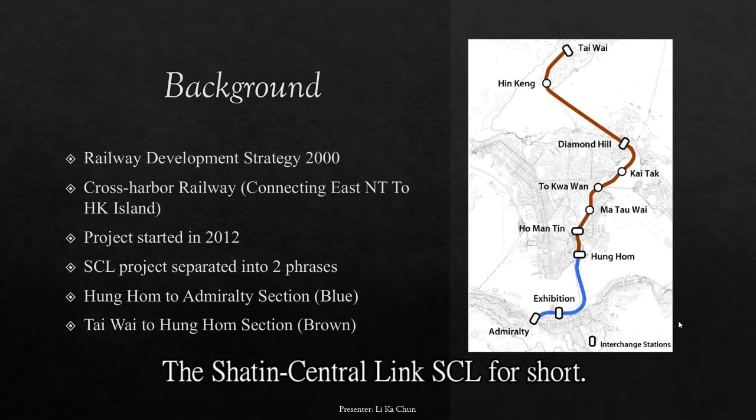The Shatin-Central Link, SCL for short, this project has been proposed in the Railway Development Strategy 2000 by the Transport Bureau. The SCL provides a new cross-harbour option and connects the East New Territories and Hong Kong Island. The SCL project is funded by the Hong Kong government. The construction project started in 2012.

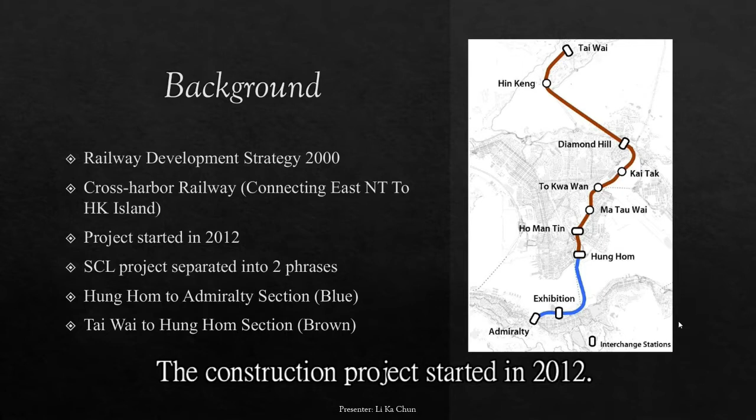The SCL project will be separated into two phases: the Hung Hom to Admiralty section and the Tai Wai to Hung Hom section. The most important part of our project is why we are doing this project and what we want to achieve, and there are three main objectives for this project.

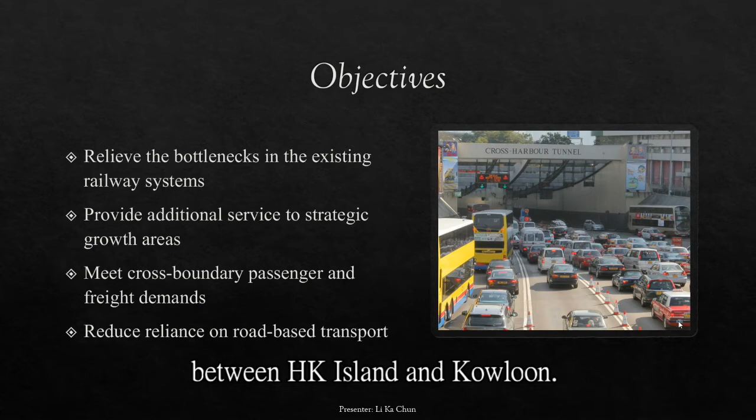First, as the high demand of the cross-harbour tunnel between Hong Kong Island and Kowloon is creating traffic jams, leading to economic loss and wasting time, this project is needed to relieve the situation.

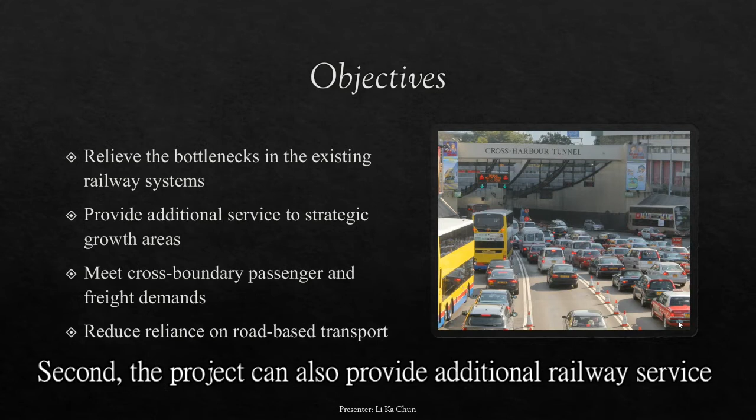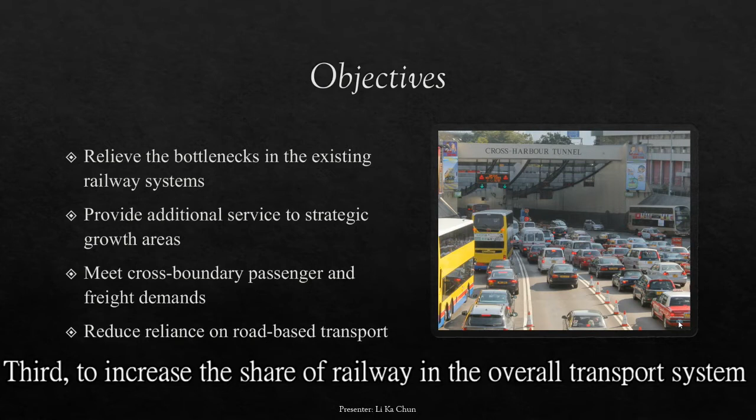Second, the project can also provide additional railway service to strategic growth areas for housing and economic development. Third, to increase the share of railway in the overall transport system to reduce reliance on road-based transport.

For the short-term goals, the section between Kowloon Tong and Tai Wai station of the East Rail Line is very busy. Passengers from the Ma On Shan district and New Territories need to pass through Tai Wai station, while more passengers can only interchange at Kowloon Tong station.

Therefore, the SCL would be able to relieve the bottlenecks in the East Rail Line and the cross-harbour section of the Tsuen Wan Line. The project also connects locations lacking convenient public transport, including Ho Man Tin, To Kwa Wan, and Ma Tau Wai area.

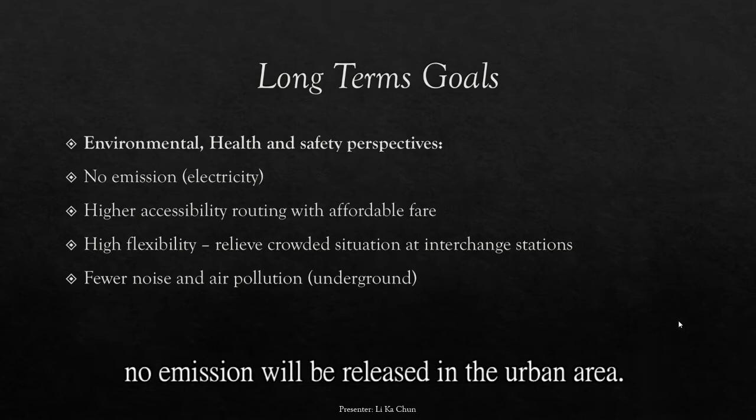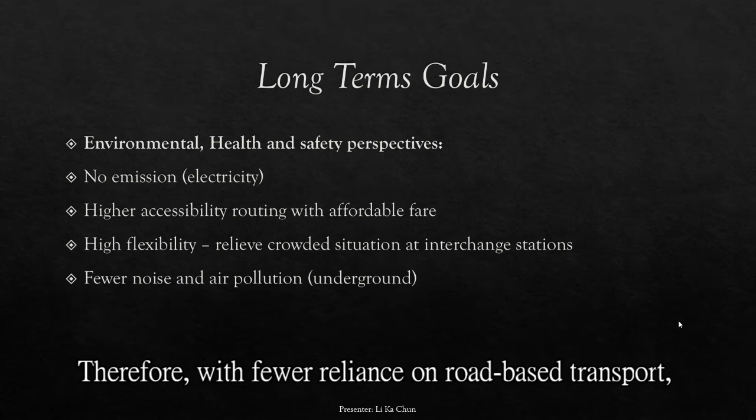For the long-term goals, trains use electricity and no emissions will be released in the urban area. In addition, with higher accessibility and affordable fare, people may tend to choose railway rather than driving. Therefore, with fewer reliance on road-based transport, less noise and air pollution will be produced.

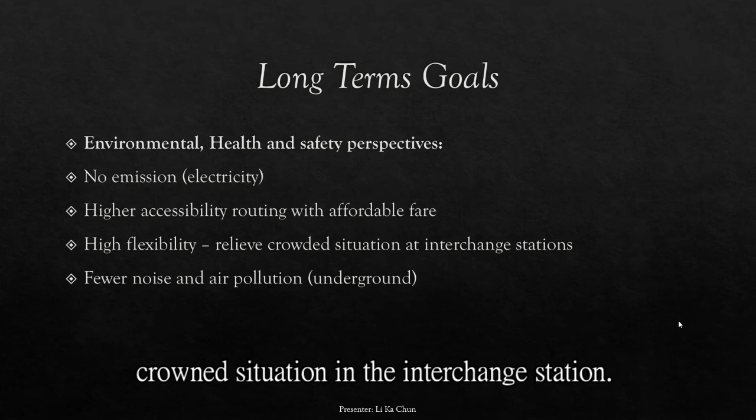The high flexibility railway could help relieve the crowded situation in interchange stations. Therefore, the SCL project could contribute from environmental, health, and safety perspectives.

One more thing is the social and economic benefits. The SCL project is estimated to carry 1 million passengers per day, which could bring 4.1 billion Hong Kong dollars revenue per year, including the economic benefits by saving time.

The SCL can also generate employment opportunities during construction and operations. Now let's talk about the scope of the project.

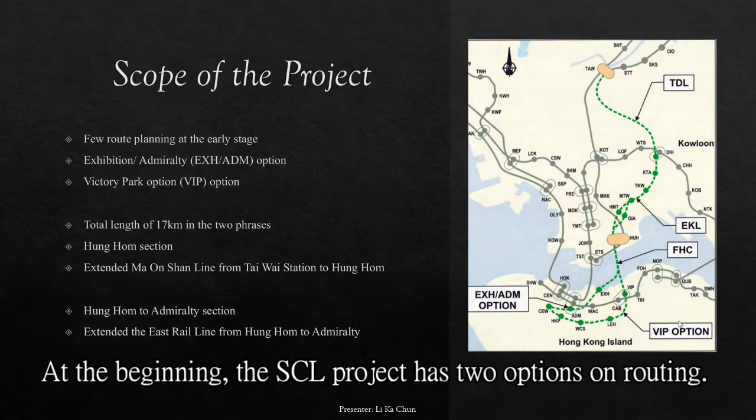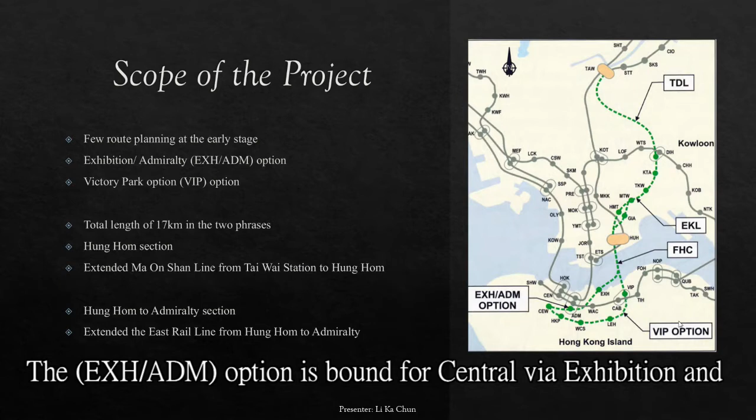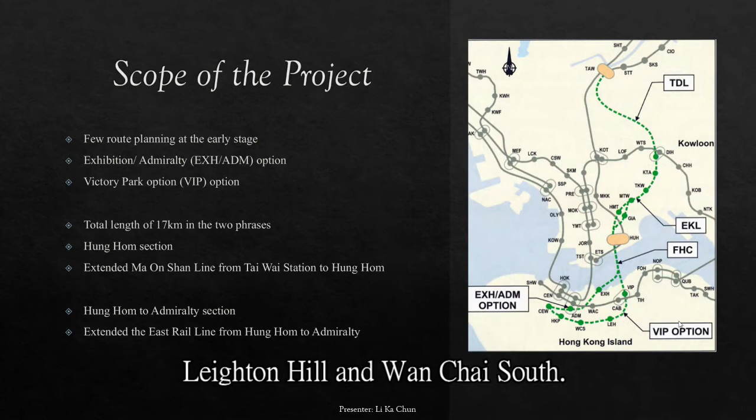At the beginning, the SCL project had two options on routing: the Exhibition or Admiralty option, and the Victoria Park option. The Exhibition option is bound for Central, Exhibition, and Admiralty stations. However, the Victoria Park option is via Victoria Park, Leighton Hill, and Wan Chai South. Finally, the SCL project adopted the Exhibition option.

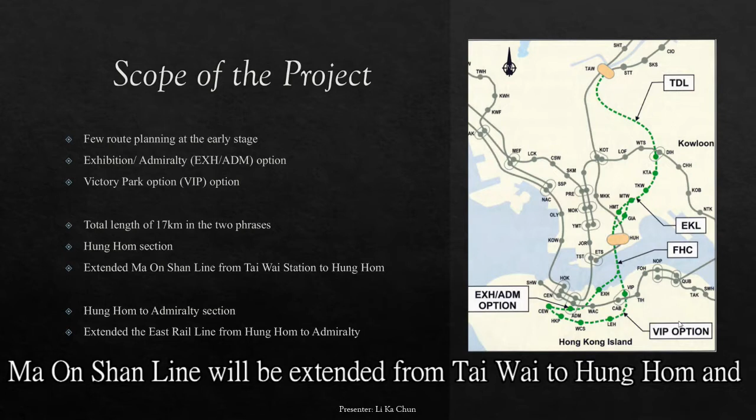The current project has been separated into two phases, total length 17 km. For the Tai Wai to Hung Hom section, the Ma On Shan Line will be extended from Tai Wai to Hung Hom station and connect the West Rail Line to become the Tuen Ma Line.

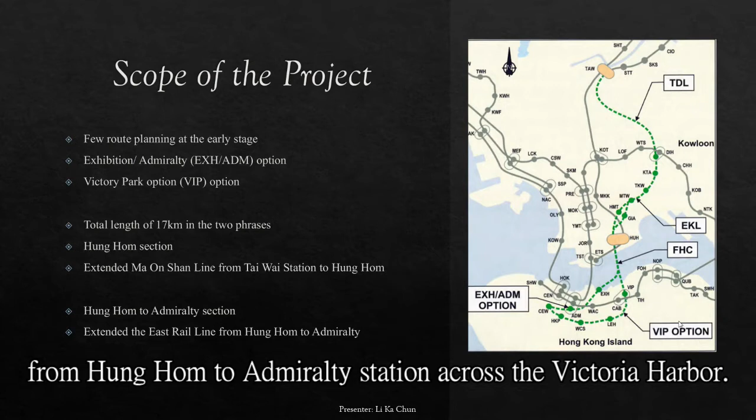And the Hung Hom to Admiralty section is extending the East Rail Line from Hung Hom to Admiralty station across the Victoria Harbour. That's all of my part, and I will pass my time to Herman for the following part. Thank you, David, and I'm Herman. About the specific targets of time and cost.

In 2008, the Hong Kong government approved the planning and design of the Shatin-Central Link. In 2010, the Railway Scheme Gazette was published to inform the public. In 2012, the funding for the SCL project was approved and construction commenced in the same year, expected to be completed in 2022.

The SCL Phase 1 experienced poor construction quality at the Hung Hom station, leading to delayed commencement of the SCL project. The Tsuen Wan Line has been split into two phases. Regarding the cost, simply estimated, the maximum cost would be 100 billion Hong Kong dollars.

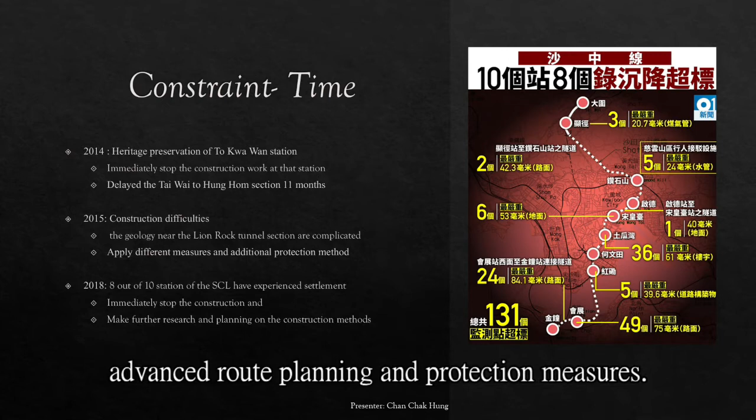For the time constraint, in 2014, previous historical relics were found at the To Kwa Wan station construction site. The MTR immediately stopped construction work at that station and conducted a detailed survey for advanced route planning and protection measures. This action delayed the Tai Wai to Hung Hom section for 11 months.

Second, there were construction difficulties in 2015. The geology near the Lion Rock Tunnel section is complicated.

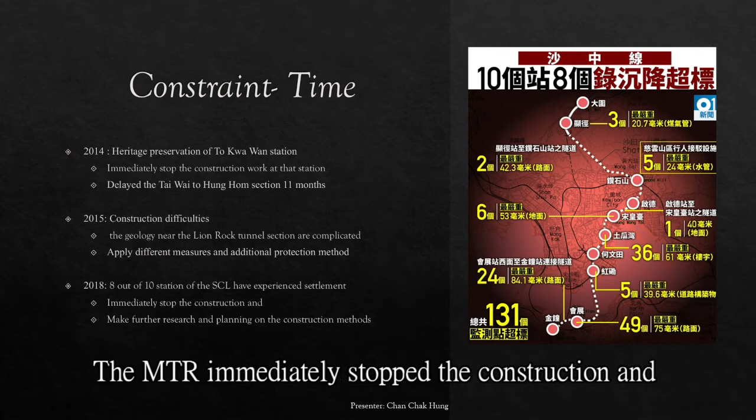Therefore, the MTR company is required to apply different measures and additional protection methods to solve the problem. In 2018, it was discovered 8 out of 10 stations of the SCL exceed the settlement level standard. The MTR immediately stopped the construction and made further research and planning to ensure the settlement event will not influence other buildings and road conditions.

With regard to the cost, the MTR estimated that the construction cost increased from 79.8 billion to 97.1 billion Hong Kong dollars, as the construction process and commencement date were delayed. The first reason would be a series of construction difficulties mentioned in the previous slide. Second, COVID-19 and other accidents affected the process of the project significantly.

Let's move to discuss the social concern. Construction brings inconvenience to the society. The East Rail Line is one of the busiest sections of the MTR, as it connects people between Kowloon and New Territories. It's now extending to Hong Kong Island, where there is space limitation, so 12-car trains will be reordered into 9-car trains. Obviously, this will lead to more crowding in some interchanging stations, such as Hung Hom, Kowloon Tong, and Tai Wai. Although MTR proposed that the frequency of the train would be increased from every 3 minutes to every 2 minutes, it's not guaranteed.

Besides, there would be some economic concern. In 2012, the Hong Kong government estimated the cost to complete the SCL project is 79.8 billion Hong Kong dollars. However, it has already become the second most expensive railway globally. MTR explained that the cost increase is because of inflation. In 2020, the estimated cost became 81.6 billion Hong Kong dollars. If the SCL project exceeds the budget again, it's hard to convince the general public and government for further construction capital.

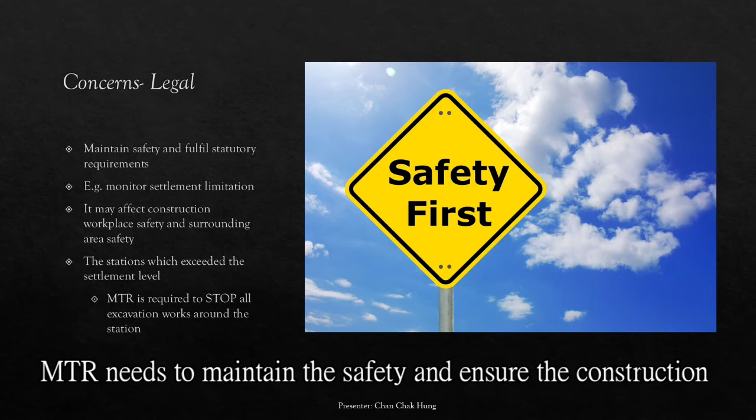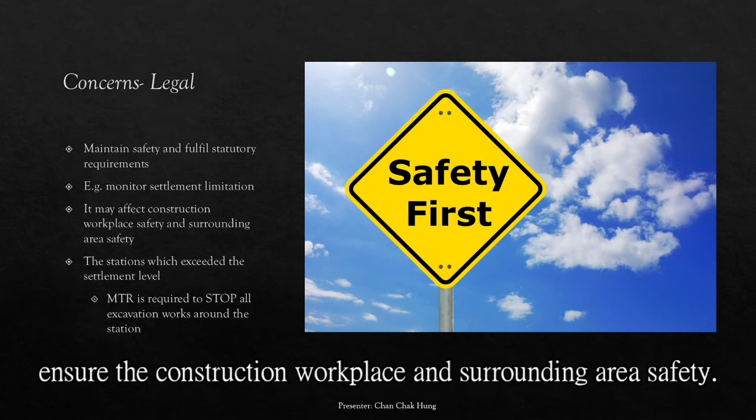With respect to the legal concern, MTR needs to maintain safety and ensure the construction meets legal requirements. For example, MTR needs to monitor the settlement limitation to ensure the construction workplace and surrounding areas are safe. In terms of technical concerns, there is less room for constructing new stations, tunnels and platforms in Hong Kong. The only solution is to construct underground.

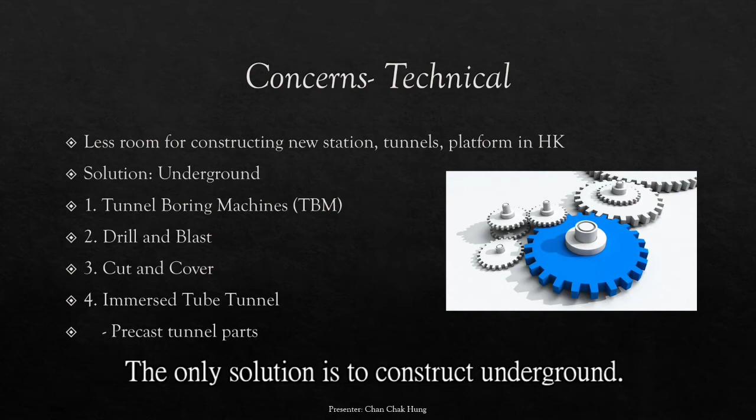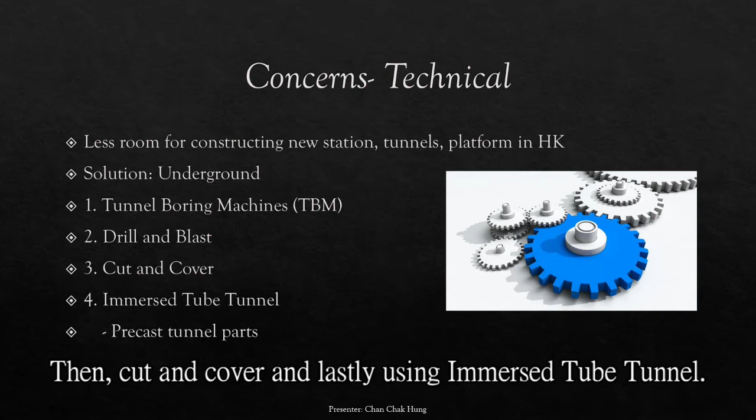The MTR proposed 4 steps. First, using tunnel boring machine. Next, drill and blast, then cut and cover. Lastly, using immersed tube tunnel.

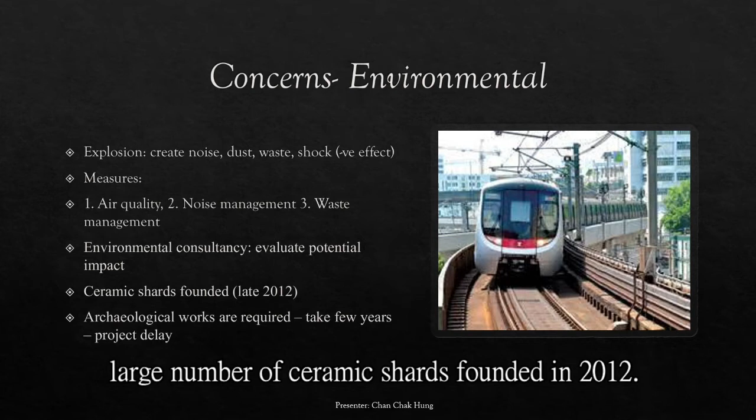The last concern would be on the environmental aspect. The construction will create air pollution, noise pollution and chemical waste. The MTR is required to propose some measures to alleviate the problems. Moreover, there are a large number of ceramic shards found in 2012. Then, archaeological works are required, which might take a few years. Therefore, it's believed that the cultural village and historical sites would affect the process of the construction.

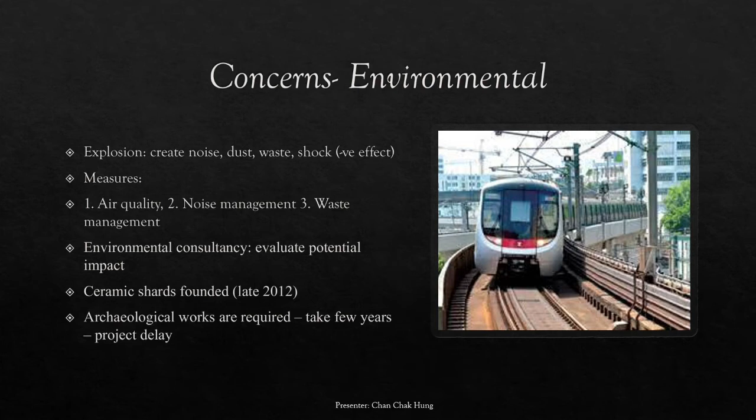The Hong Kong government offers funds to the construction of SCL and entrusted MTRCL to carry out the project. The EAT and IAP are the third-party audit teams hired by the government to monitor the progress and review any irregularities. Different government departments have to monitor the project progress and report the latest information to the Transport Housing Bureau, while the construction team and quality team of the MTRCL are responsible for the construction work of the SCL project and review the construction work quality respectively.

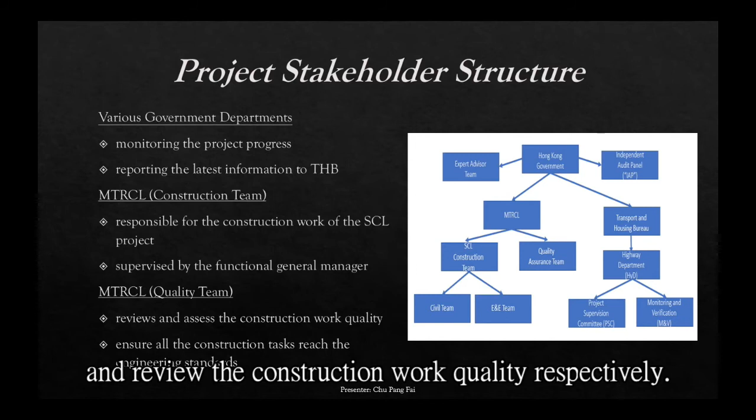For the Highway Department's role and responsibility, they have to hold monthly project coordination meetings and project progress meetings with the MTRCL and conduct inspection audits. Two consultant companies are hired by the Highway Department: M&V and PSC. The Project Supervision Committee, PSC, is mainly responsible for procurement activities, post-tender cost control, resolution and contractual claims. Monitoring and Verification, M&V, assists the monitoring work and conducts regular audits.

The expert advisor team is formed by the Transport Housing Bureau and 3 senior retired government officers deployed from the Highway Department, Building Department, and Civil Engineering and Development Department. They have to provide technical support and review the latest progress of the SCL project.

Their major responsibility is reviewing the work performed by the related stakeholders and proposing improvements to the existing project integrated management system of the MTRCL. For the Independent Audit Panel, IAP, they are responsible for auditing the project improvement plan and progress of implementation by submitting reports.

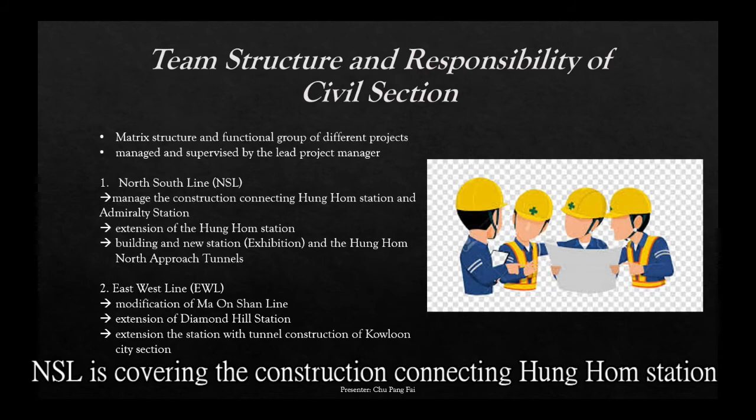NSL covers the construction connecting Hung Hom Station and Admiralty Station, while the EWL involves several station modifications of the Ma On Shan Line.

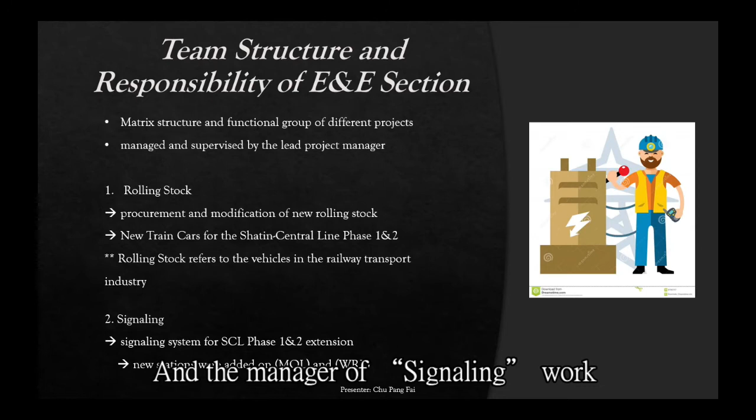Then it shows the team structure of the E&E section. It is also matrix informed, and the most important projects would be rolling stock and signaling. Rolling stock refers to trains, and the manager is responsible for procurement and modification of new rolling stock, while the manager of signaling works on a number of signaling systems for the SCL Phase 1 and 2 extension.

Then I will pass to my groupmates to talk about the project plan. Thank you, Fred, and I'm Carrick. Now I would like to introduce the Shatin-Central Link project Gantt chart.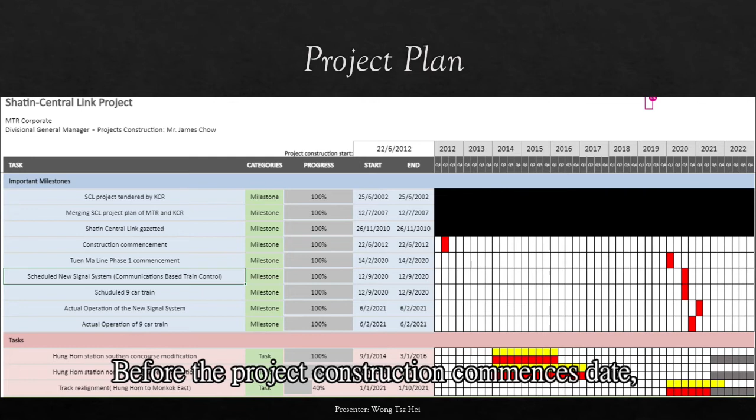This Gantt chart shows the milestones, tasks, and targets of the SCL project. Before the project construction commenced, there were several milestones achieved. For example, the MTR and the KCR cooperated to merge the SCL project plan.

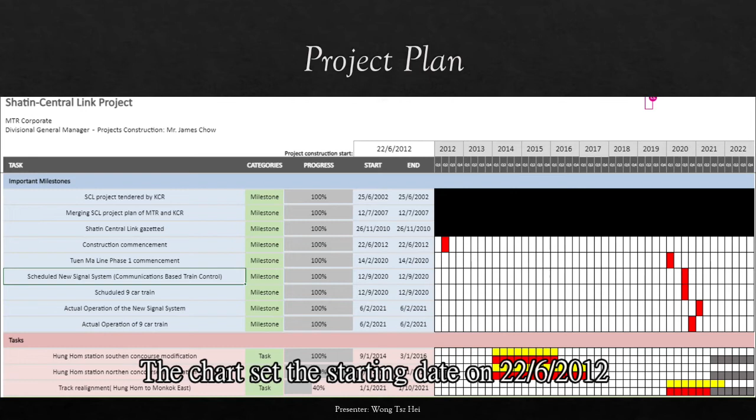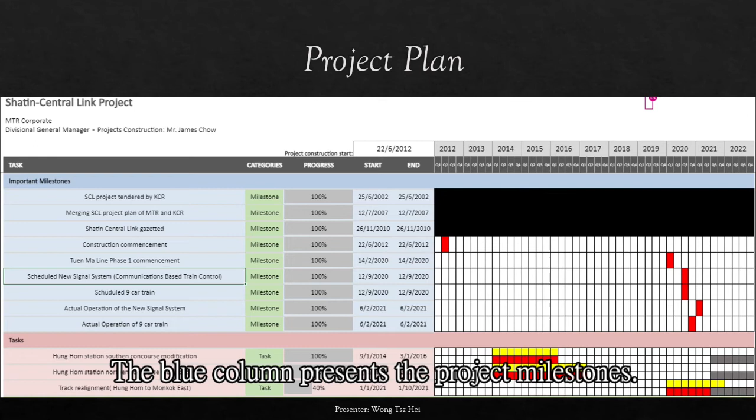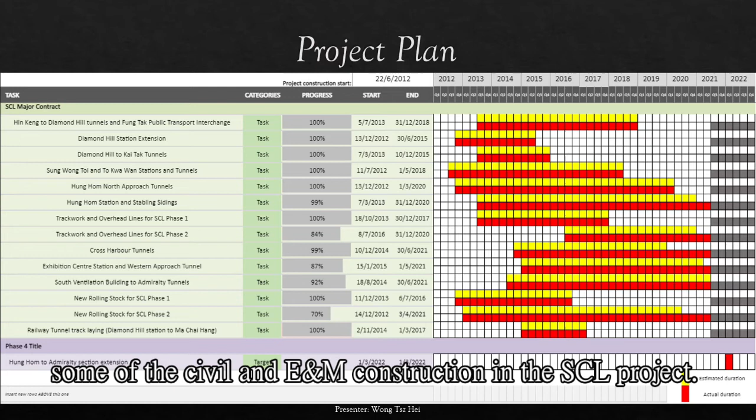Now we'll start from the left-hand side of the chart. The chart sets the starting date on the 22nd of June 2012, which is the SCL construction commence date, running from 2012 to 2022. The blue column presents the project milestones. The pink column lists some station concourse modification tasks. The green column presents major tasks, including civil and E&M construction in the SCL project. Finally, the purple column shows the targets of the whole SCL commencement date.

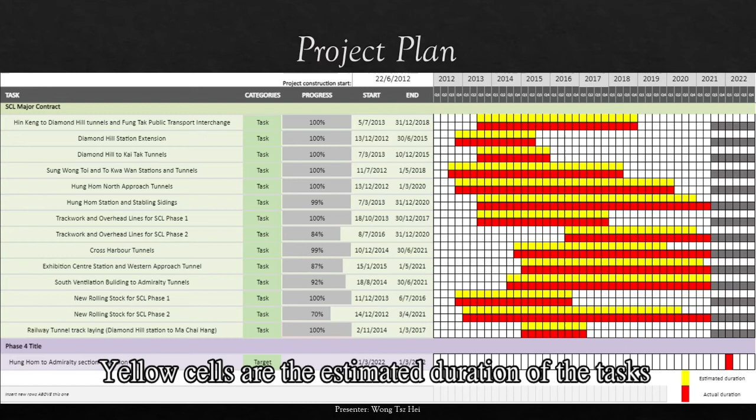Now we'll turn to the right-hand side of the chart. One small cell represents a quarter of the year, so four small cells represent a year. Yellow cells are the estimated duration of the task, and red cells are the actual duration of the task.

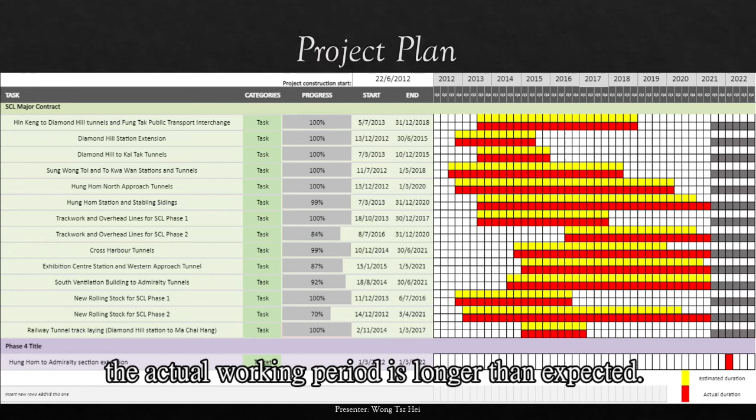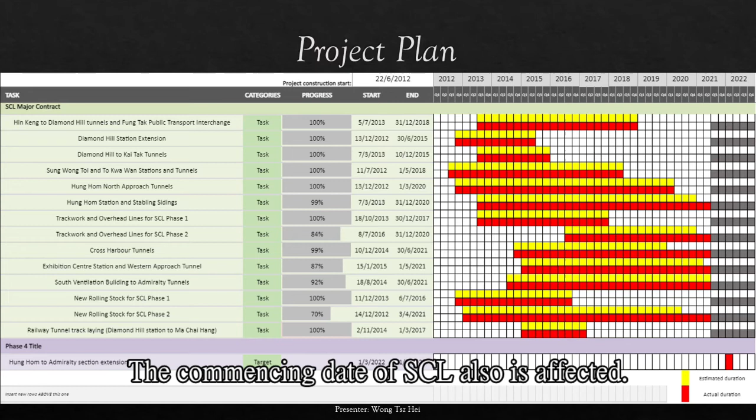It can be seen that for some tasks, the actual working period is longer than expected. This is one indication that the SCL project has been delayed, and the commencement date of the SCL project is also affected. Now I would like to pass the time to Macy to talk about the risks of the SCL project and provide solutions. Thank you.

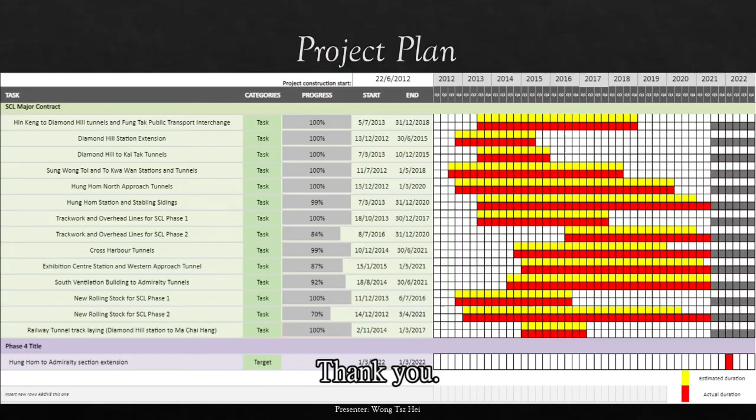Thank you to my teammate. This is Macy, and I will introduce our risk analysis. Knowing that the infrastructure of the Shatin to Central Link is a magnificent project that involves plenty of parties and requires years to complete, during this period there are surely possibilities to face different levels of difficulties from various dimensions, including factors from internal, external, and environmental sources.

The first part of the risk matrix is purchasing. Referring to cost inflation on construction materials, it is possible to double the cost in 5 years. With no doubt, the most affected impact is the monetary concern. However, there are existing and potential safeguards, such as making a detailed cost plan, monitoring the schedule strictly, reserving enough extra budget, and seeking alternative sources of material. Moreover, hedging could be done if possible.

There is a high chance this will happen and directly affect the project. As a result, it is decided to classify this risk as 4C, belonging to the medium class.

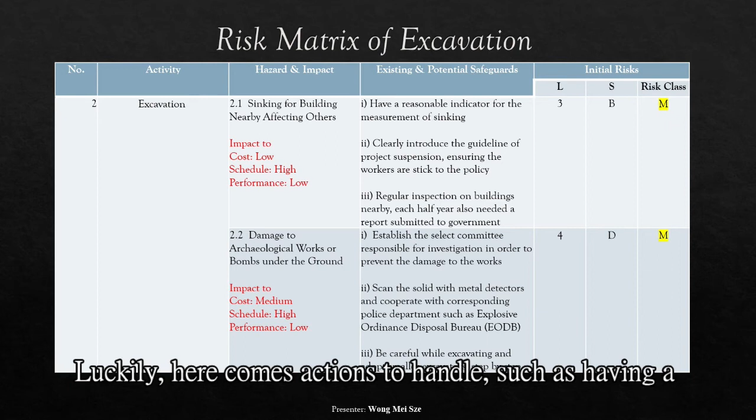Second, excavation is a factor mainly related to the environment. Sinking for buildings nearby is the first expected risk, which will highly affect the project schedule. Luckily, there are some actions to handle this, such as having a reasonable indicator and a clear guideline of project suspension, and submitting reports after regular inspection of the buildings nearby each half year.

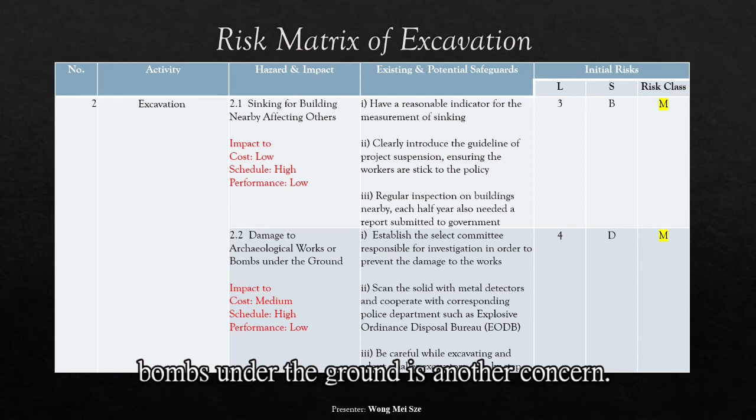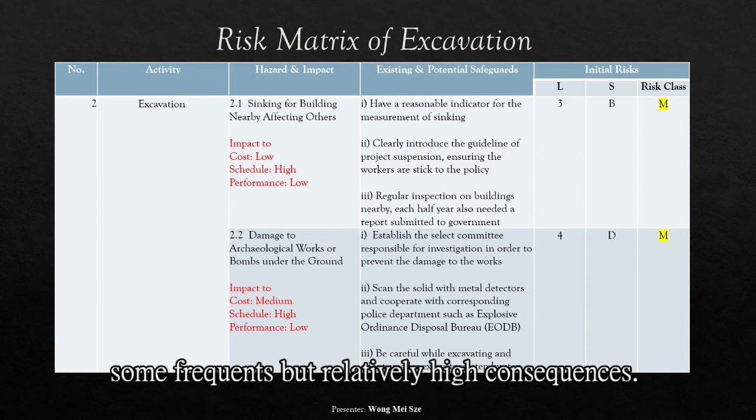Then the potential damage to archaeological works or bombs under the ground is a concern. Dealing with such cases, we can establish a select committee and scan the area with a metal detector before excavation. MTR actually cooperates with the police EOD team. Generally, we rate 2.1 and 2.2 as 3B and 4D risks correspondingly, with some frequency but relatively high consequences. This medium risk class deserves our attention.

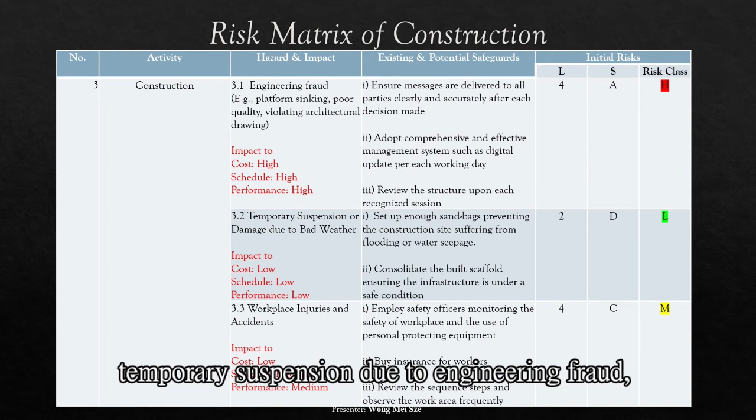Now we come to the construction part. There are three major hazards. The first one is temporary suspension due to engineering fraud, bad weather, and workplace accidents. The highest risk and impact is credited to engineering fraud, which tends to be unacceptable.

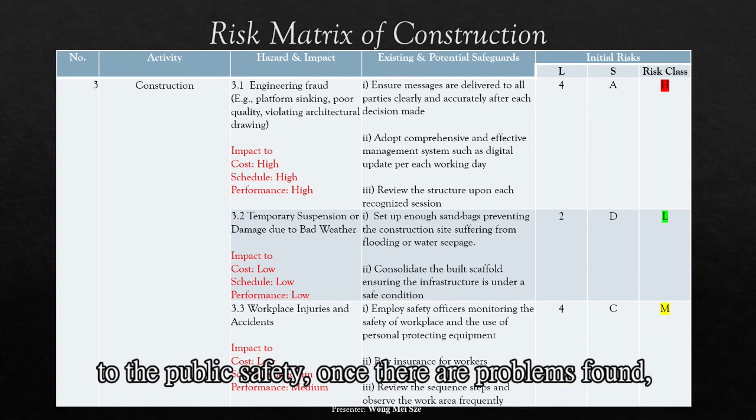Although there are some safeguards, it still cannot guarantee everything is on the right track day by day without any mistakes. Perhaps those engineering flaws are highly related to public safety. Once there are problems found, it usually takes high effort to recover.

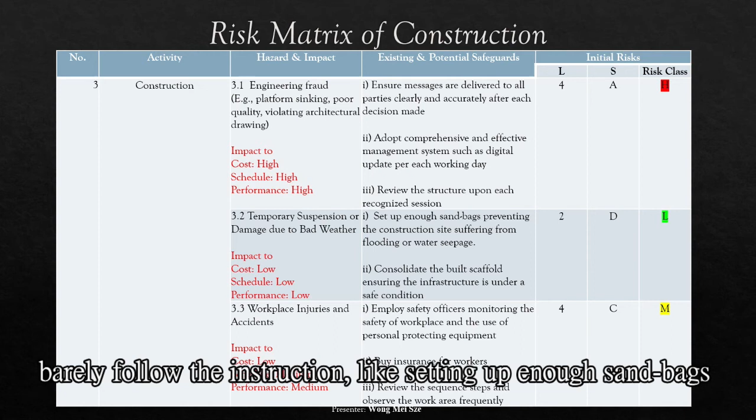The solution to bad weather would be much easier and softer. Barely follow the instructions, like setting up enough sandbags before raining, consolidating the built scaffold before typhoon.

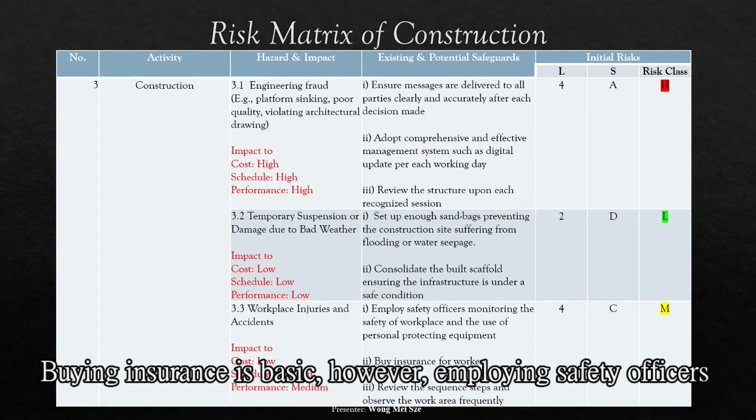Then workplace injuries is the last concern. Buying insurance is basic. However, employing safety officers and using personal protective equipment are also indispensable.

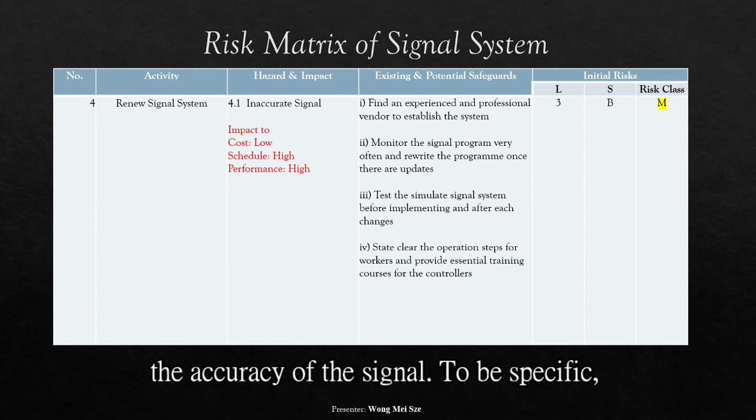The fourth activity is to renew the signal system. The project performance is definitely sensitive to the accuracy of the signal. To be specific, choosing the right and experienced vendor is important, and testing the simulated signal system before implementing and after each change is also needed.

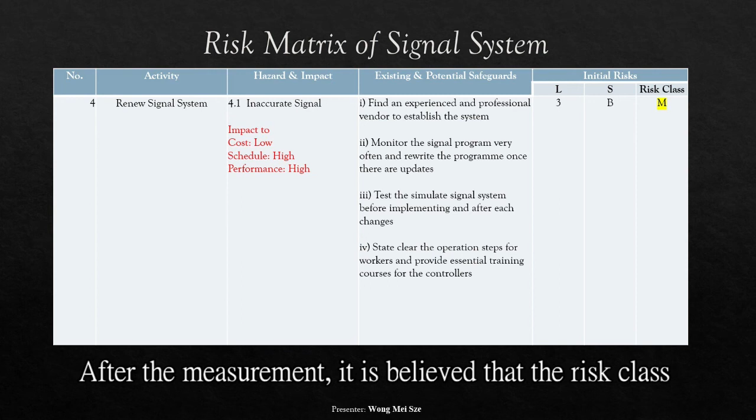After the measurement, it is believed that the risk class is medium as the initial rate is 3B. The consequence is relatively minor, but this could be solved. The major loss is barely time.

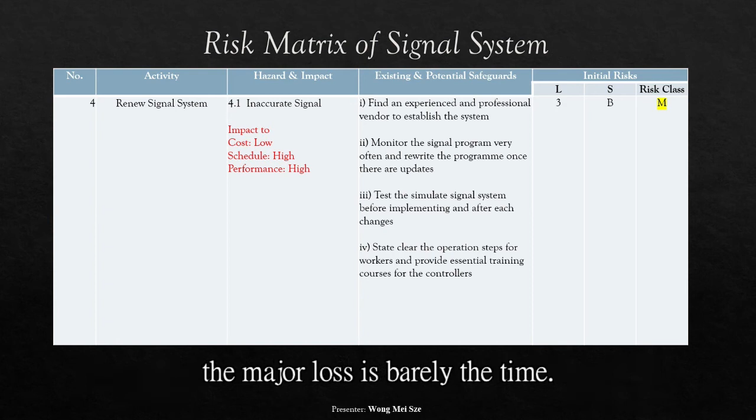Last but not least, as the project of Shatin to Central Link is produced by the government, MTR, and more external partners such as Leighton Asia, this activity is referring to the risks incurred by partnering.

Partners may have misconduct and human error regarding professionalism. For example, cutting corners, cheating, and even hiding facts. All the results that turn out will extremely affect the cost, schedule, and performance.

In the worst cases, the government may lose control, and until issues are revealed by media, we define the risk class as high, and its consequence is too large.

Therefore, some safeguards are wise. For instance, all details need to be stated in the contract in black and white clearly, and management should assign responsibility before every decision, while recording each class and requiring sign off as the project organizer.

Government and MTR should send their own professionals to supervise and check the performance of the partner. Once there are actions violating the contract intentionally, compensation is a must too.

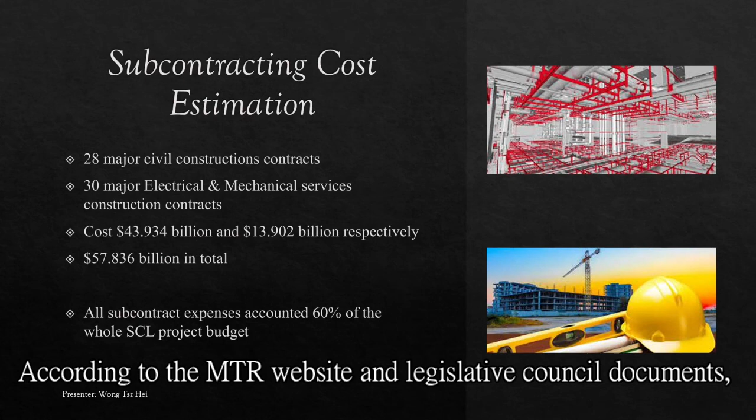According to the MTR website and the Legislative Council documents, the SCL project includes 28 civil and 30 E&M contracts. It costs 43 billion and 13.9 billion Hong Kong dollars respectively.

In total, it costs 57.8 billion Hong Kong dollars. All the subcontracts accounted for around 60% of the whole SCL project budget.

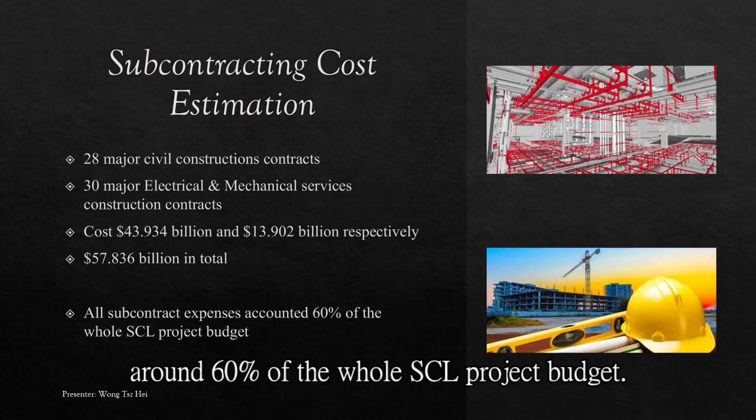Although the MTRC already completed the risk management and reserved costs for contingency, there are lots of unforeseeable situations and factors that happen under the project. For example, the archaeological discovery.

To take the appropriate measure, extra time and manpower are required to conduct the survey. It leads to a higher expenditure and cost.

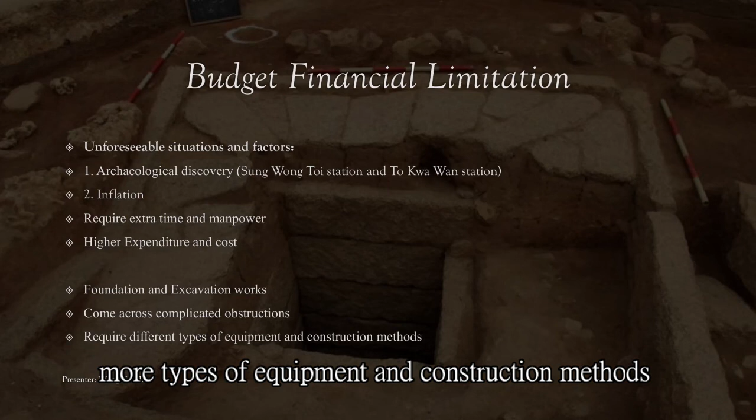Moreover, the foundation and excavation works may come across a larger amount or more complicated obstructions. Hence, the constructor may require using more types of equipment and construction methods to cope with different situations.

With extra costs needed, contractors may submit claims to MTR. The MTRC will examine the claims and assess the amount with different factors.

Until 30th of June 2020, 1,088 substantiated claims were received by the MTRC, and 467 cases were resolved. It totaled 2,200 million Hong Kong dollars, about 3.83% of the awarded contract sum.

To conclude, well project planning benefits the project working process. After the whole SCL project plan and train operation commences, it benefits the Hong Kong public transport system, which provides more routes for the public.

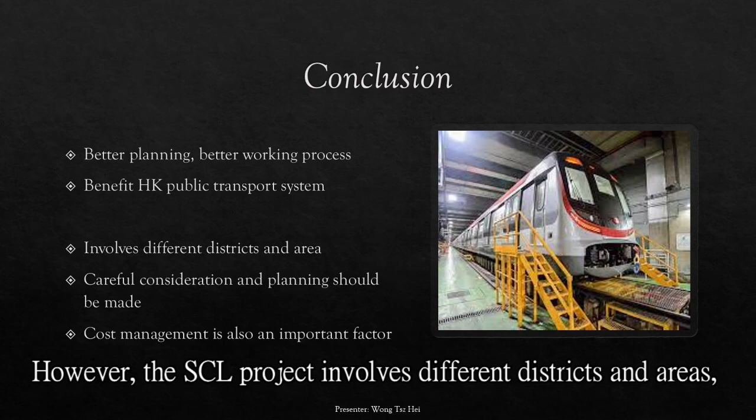However, the SCL project involves different districts and areas. Careful consideration and planning should be made to ensure the construction process runs smoothly.